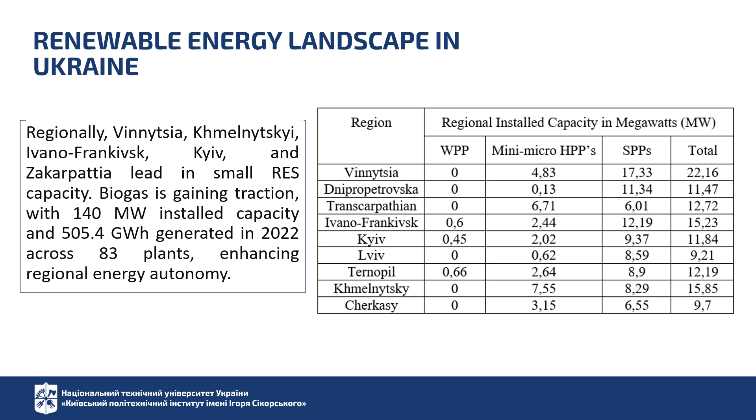This study aims to optimize small renewable energy sources plants, enhancing energy security and autonomy, with further research focusing on modernizing energy system for societal and economical benefits.

As the energy sector in Ukraine undergoes significant reforms, there is a compelling need to cultivate distributed generation and align with the principles of the European Union's fourth energy package. This has paved the way for the emergence of renewable energy communities as a contemporary decentralized solution.

Our research aims to address three key objectives. First, we explore strategies to ensure the autonomous operation of renewable energy communities. Second, we delve into sustainability of this autonomous system, particularly during conditions of autonomy or blackouts. And third, we focused on optimizing existing hybrid power systems that incorporate diverse renewable energy sources such as solar, wind,

hydro, and biogas. Ultimately, our overarching goal is to devise strategies that fortify Ukraine's energy security by maximizing the potential of renewable energy communities and hybrid system, thereby reducing dependence on centralized network and fostering a resilient decentralized energy infrastructure.

This model on the slide encapsulates the operational dynamics of low-power hybrid renewable energy systems, considering mode characteristics of generation sources, a set of objective functions, and technical and economical constraints. The model facilitates optimal load distribution among system components.

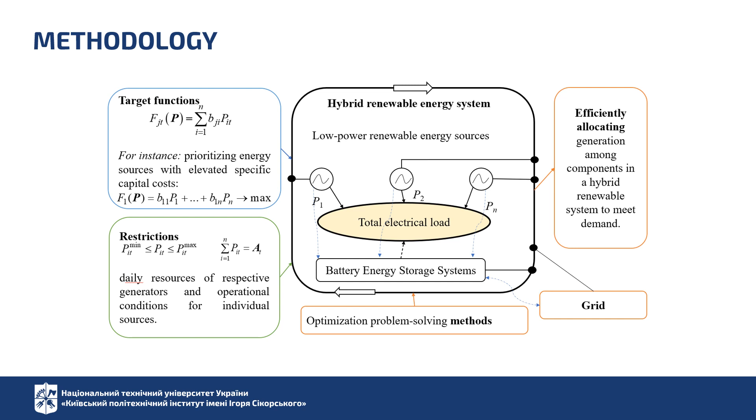Addressing the complexities associated with solving optimization problem or making optimal decisions involves overcoming significant challenges, with a key difficulty being the conceptualization of a reasonable optimality principle. For multi-criteria decision-making problem where the concept of vector optimum is not defined, there is no singular optimality principle. The only viable approach to tackling this challenge is to narrow down the Pareto region.

Recognizing the multi-criteria nature of the optimization problem, we employed the Bellman-Zadeh method, grounded in principles of fuzzy set theory. This method offers several advantages. First, it allows for the simultaneous consideration of quantitative and qualitative factors with the ability to distinguish their relative importance.

Second, it provides a clear and logical definition of the optimality criterion focused on maximizing the achievement of all target functions. And third, it guarantees that the solution obtained belongs to the Pareto optimal region, representing the most harmonious solution. Through the iterative process, the method derives a fuzzy solution, which is then defuzzified by selecting the alternative with the highest degree of membership, representing the optimal decision.

By incorporating this robust multi-criteria decision-making approach, our methodology aims to strike a balance between reliability, cost, and environmental considerations, ultimately optimizing the operation of renewable energy communities for enhanced energy autonomy and security.

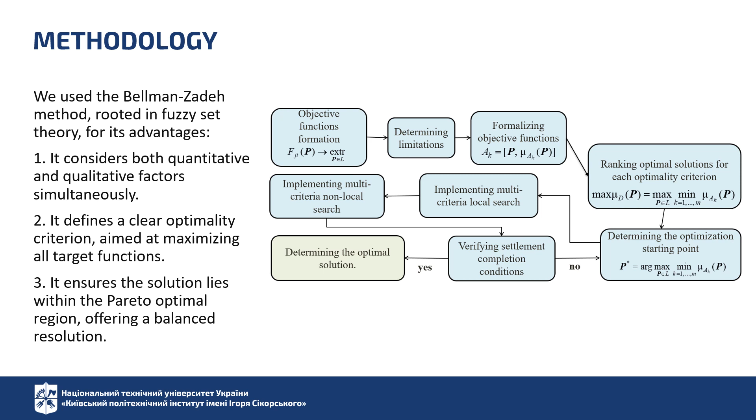To evaluate the feasibility and implications of achieving autonomy for renewable energy communities in Ukraine, we conducted simulations across 4 distinct renewable energy sources communities. These structures were delineated by varying the ratios of installed capacities among different types of generation sources, namely solar photovoltaic plants, micro hydropower plants, and biogas plants.

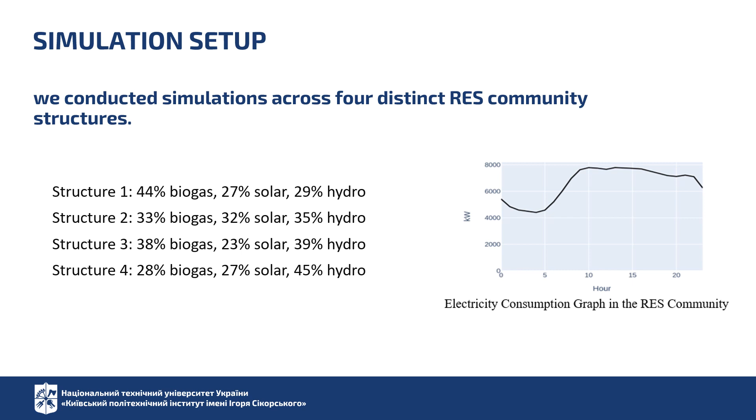Our first set of simulations explored the scenario of achieving autonomy for the renewable energy community by augmenting the installed capacity of biogas generation. We conducted simulations with variations in the installed capacity within the range of 50% to 200% of the current capacity levels.

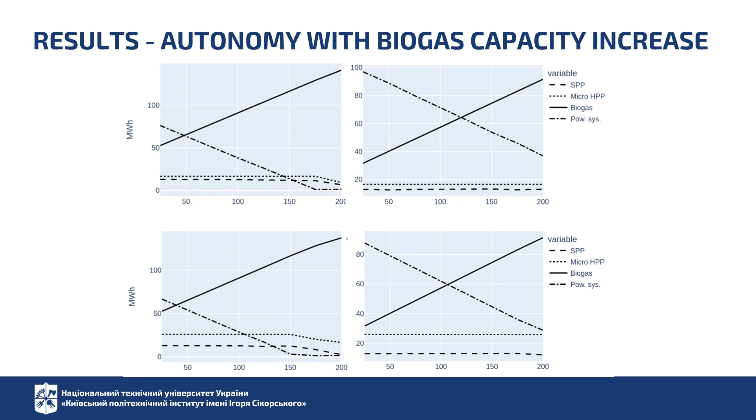On this slide, you can see the optimal loading profiles under the initial conditions where the community relies on the external grid to meet a portion of its energy demands. In contrast, this slide depicts the optimized operation mode under the conditions of achieving autonomy through the increased installed capacity of biogas generation. This mode ensures that all the consumed electricity is generated within the community, eliminating the need for

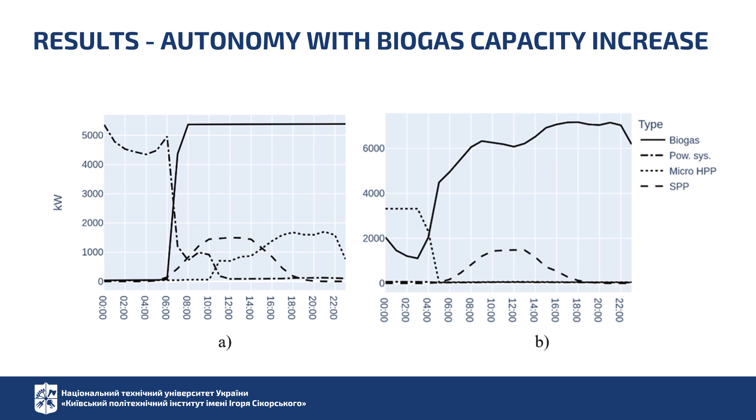external power flows. These results underscore the significant capacity investment required to transition towards energy self-sufficiency, especially for communities with a large reliance on biogas generation.

However, similar to the biogas scenario, our results indicate that autonomy remains untenable for the type 2 and type 4 structures, even with a 500% increase in the installed capacity.

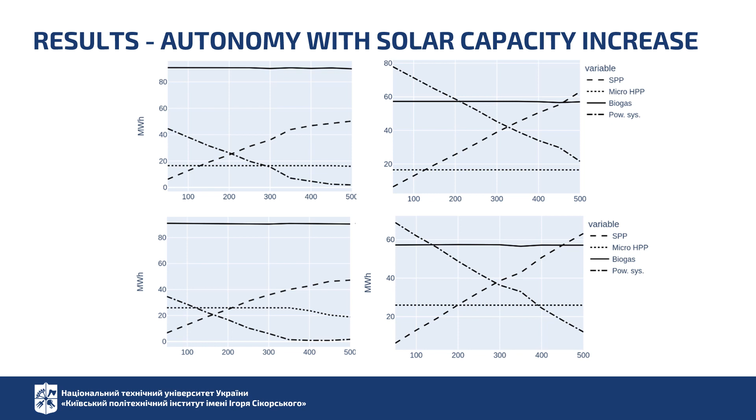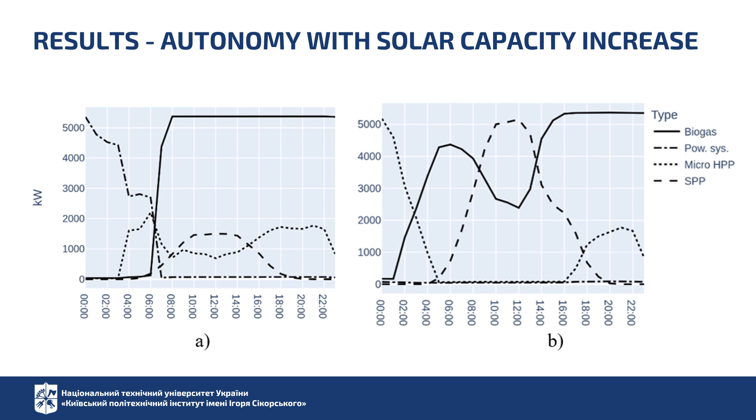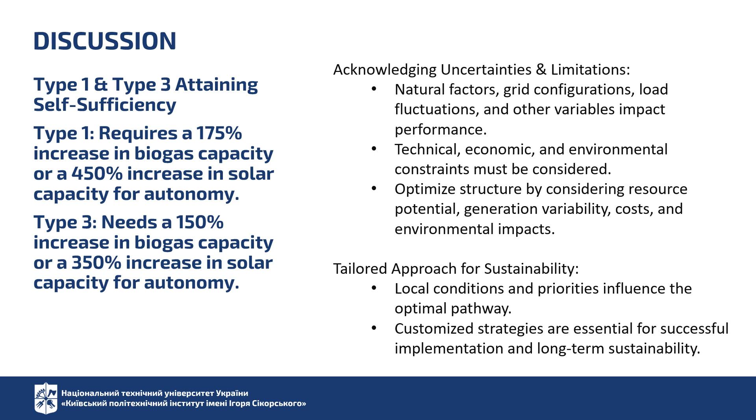The results from our simulations and optimization analysis shed light on the feasibility and implications of achieving autonomy for renewable energy communities in Ukraine. While these capacity increases may seem daunting, it's essential to recognize the potential benefits of achieving energy autonomy through resilient renewable energy communities by reducing dependence on centralized networks and maximizing the utilization of local renewable sources. These communities can enhance supply chain reliability, bolster regional energy security, and foster local economic growth.

In conclusion, our research has shed light on prospects and strategies for achieving autonomous operation of renewable energy communities in Ukraine, aligned with the ongoing energy sector reforms and the transition towards decentralized resilient systems. Through rigorous simulation and optimization analysis, we have demonstrated that attaining energy autonomy for certain renewable energy sources community structures is indeed feasible, albeit requiring substantial increase in installed generation capacity.